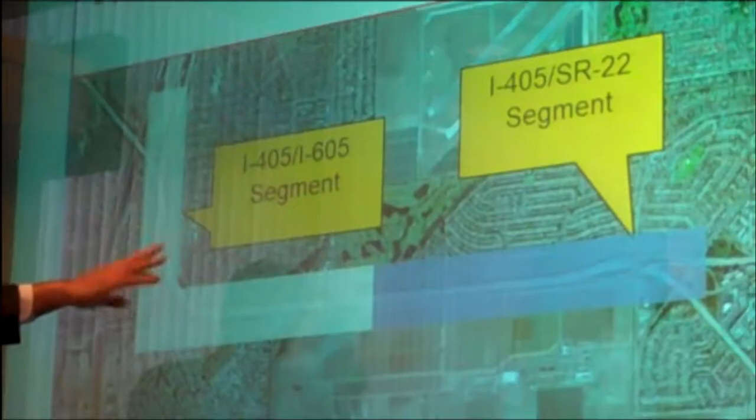We've broken the West County Connectors project into two segments: east and west. We did that for a number of reasons, but essentially the two segments take us just east of Valley View onto the 405, around about where Lampson is, and then the west segment takes us from there up onto the 605 freeway.

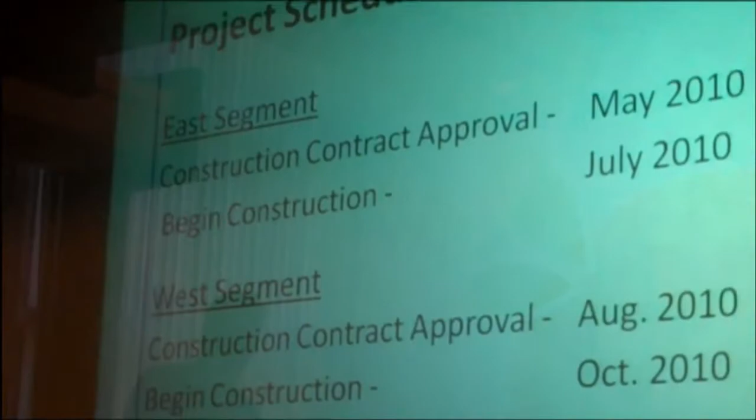So the schedule for the project: for the east segment, we've opened bids and expect construction contract approval this month. The contractor typically has 55 days to mobilize, so we'd expect to see them out there in July of this year. For the west segment, it's out for bids at the moment. Caltrans have advertised it, and we'll be opening bids on July 1st, with construction contract approval approximately August, and construction scheduled to begin approximately October of this year.

Just to give a little overview, I've spoken about us and Caltrans, and it's not an us and them scenario, but first I'll talk about the funding. For the east segment, we have a total of $200 million, a combination of $150 million in CMAQ program dollars and $50 million in American Recovery and Reinvestment Act dollars. For the west segment, it's all $200 million in Corridor Mobility Improvement Act, Prop 1B funding, for a total of $400 million as our budget.

Now, back to the us and them scenario with OCTA: we oversaw the design of both the east and west segments, and we're also providing construction management consultants during construction of the project, and overseeing the community outreach for the West County Connectors project. Caltrans provided design independent quality assurance during design, and Caltrans will administer construction of the West County Connectors project. So, where is it?

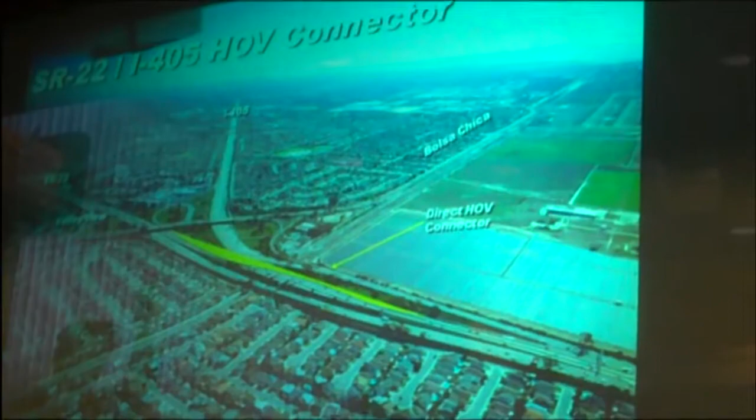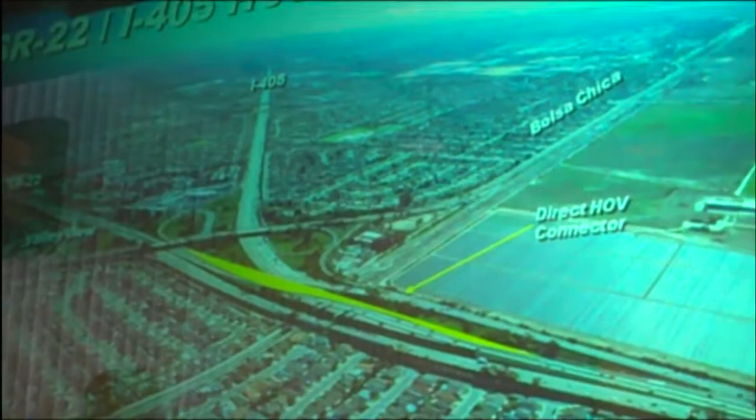I don't know how familiar everybody is with the area, but this overhead shows us over College Park East, and on the right-hand side is the Seal Beach Naval Weapons Station. We're looking down the 405 freeway, with the 22 coming out here. This overhead shows approximately where this new HOV connector bridge is going to go, from the center of the 22 freeway over the interchange with the 405 and down onto the 405 freeway. We're building an extra 2 lanes on the 405 freeway—today there are 2 carpool lanes, or HOV lanes, on the 405.

When we're done, there will be 4 carpool lanes, 2 in each direction. Up at the west end of the project, we're over Long Beach a little bit, looking back over Rossmoor. This overhead shows the approximate location of where this new HOV connector bridge is going to take us from the 405 to connect up with the existing HOV lanes on the 605.

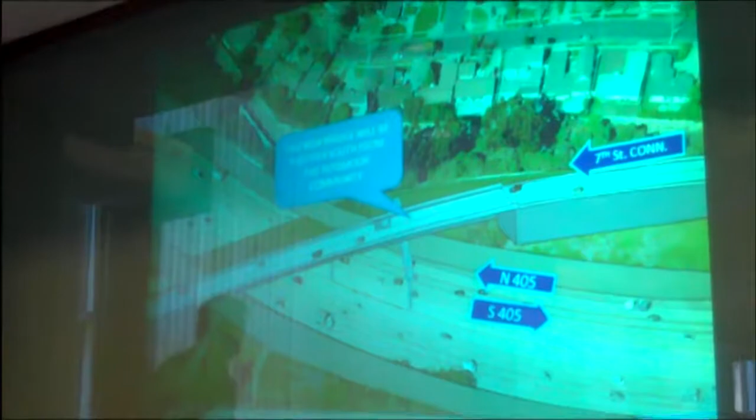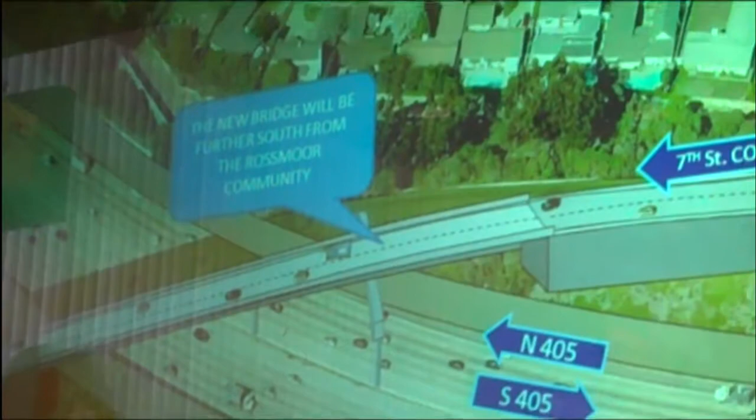As part of widening the freeway, we have to demolish a few bridges, one of them at the 7th Street off-ramp—the North 405 West 22 connector bridge. Unlike Seal Beach Boulevard and Valley View Street bridges, this bridge has to be demolished all at once, for various reasons. The simplest is space constraint—we're crossing the freeway here at an angle, and the way the existing bridge was built doesn't allow us to demolish in 2 halves, which you'll see in the next couple of slides for what we're doing at Seal Beach Boulevard.

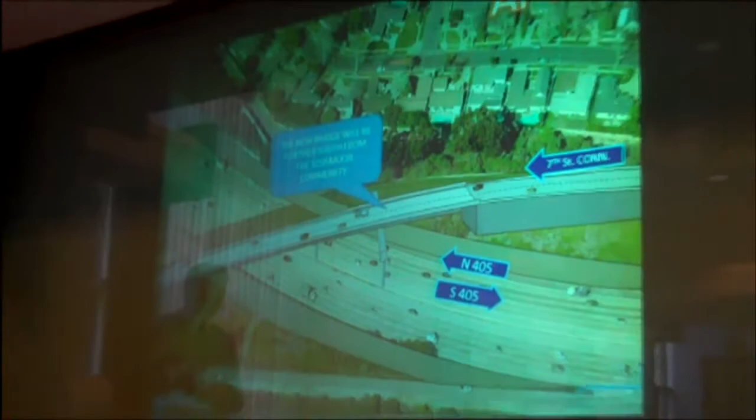So the 7th Street bridge, when we demolish and reconstruct it, will be closed for approximately 1 year. Every time I give this kind of show and tell, I stop when I say 1 year, because there's usually a collective gulp, and everybody, especially in Long Beach, freaks out—well, a year, what are we going to do for a year while this bridge is closed?

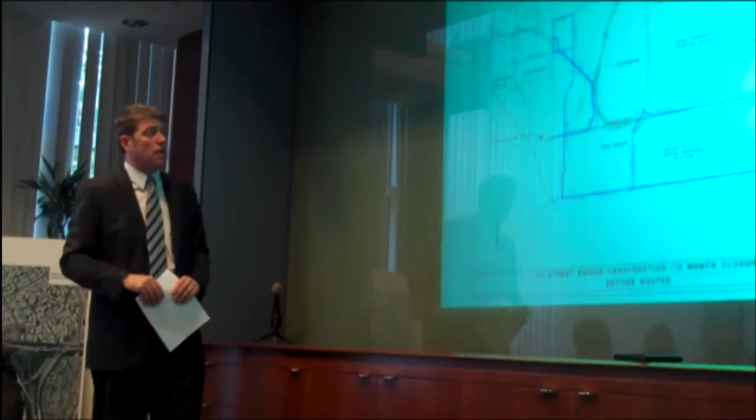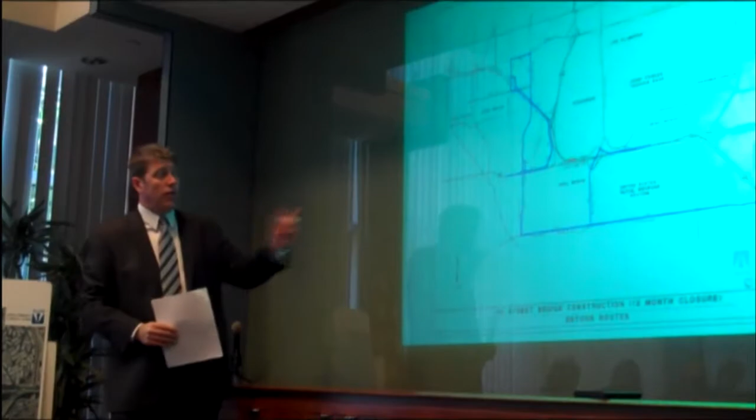And while we've worked with the cities of Long Beach and all of the others around to work on various detour routes, this one is probably the most important for when that one bridge is out, and it shows all the detour routes that we've proposed.

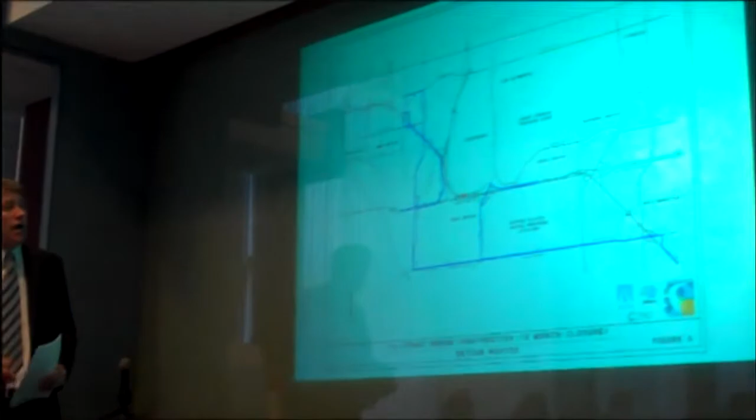We have a traffic management plan, and we have cooperative agreements with all of the cities to work through during the time when we have that detour route in place, when the bridge is closed.

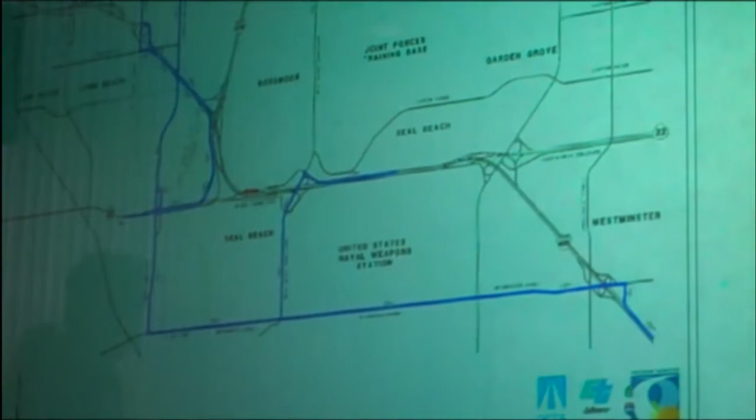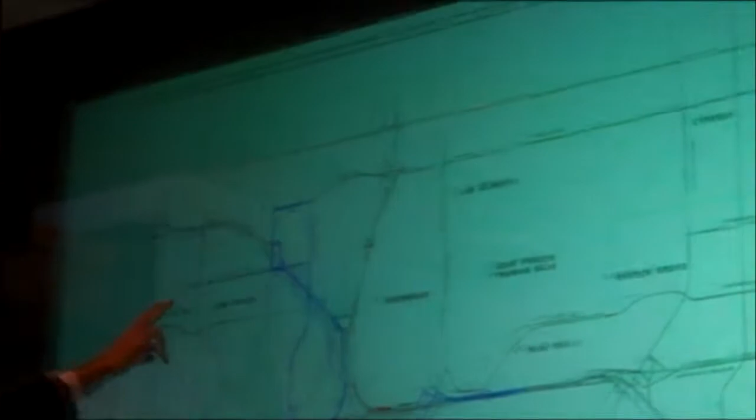You can see one of the detour routes, for example, if you're coming up to 405 and you wanted to get into Long Beach, would be to take Westminster and just take that straight into Long Beach. Or another way to do it would be to stay on the 405 and get off at Palo Verde. I kind of like this one where you take a left on Palo Verde and you get back on the 405 south and get back into Long Beach west on the 22 on that detour route.

So just to point out, it's just the north 405 to west 22 connector that will be closed. The south 405 west 22 connector and the south 605 west 22 connector will remain open. So there are various different ways to get in and out of Long Beach.

Now I talked about the 7th Street Bridge, the way it was built. Fortunately for Seal Beach Boulevard Bridge, you can see that this bridge is held up with 4 columns in cross section. And what that allows us to do is literally cut the bridge down the middle and reconstruct it in 2 halves. So the plan is to demolish the west half of the bridge first.

And to do that, we'll shift traffic onto the east side of the bridge, reconstruct the west half of the bridge, shift traffic back onto the newly constructed west half, demolish the east half, reconstruct it, connect them together, and presto, we have a new 7-lane bridge that crosses 405 at Seal Beach Boulevard.

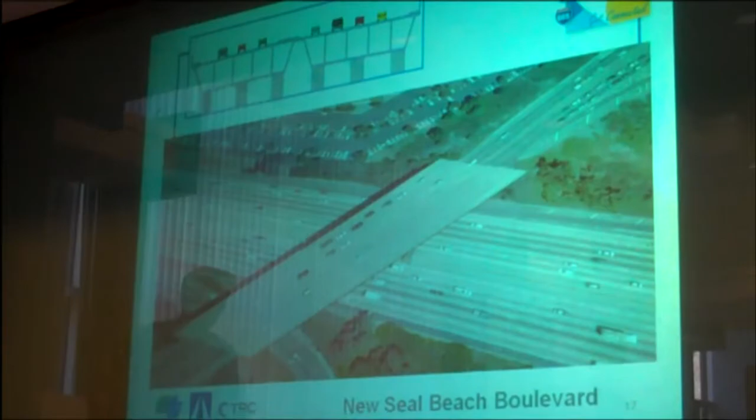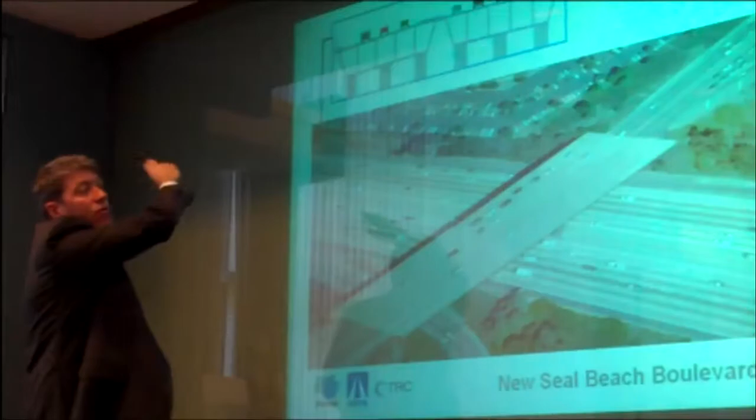And people often think, well, you've got 3 southbound, 4 northbound, why the additional northbound lane? That's really, if you think of it, almost like an auxiliary lane for traffic that comes off the 405 onto Seal Beach Boulevard, or traffic going over the Seal Beach Boulevard Bridge and getting back onto the 405 north. So there's additional traffic that takes that maneuver, and hence we have an additional lane just for that.

So Valley View Street Bridge is essentially the same as Seal Beach Boulevard. I won't go through the steps, but again, we'll demolish it in 2 halves.

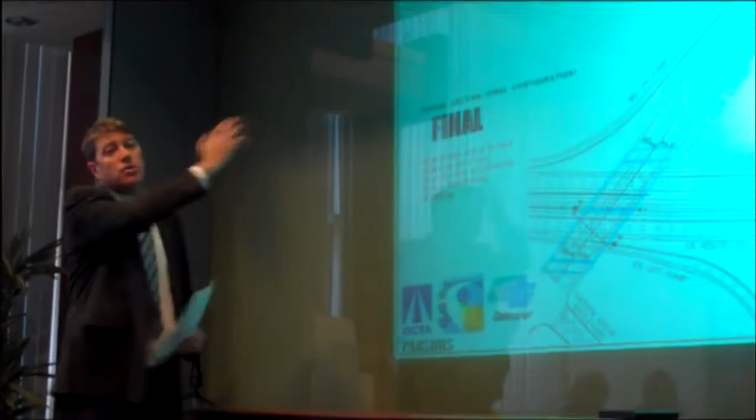One of the things to point out is that we have incentive and disincentive clauses on 3 of these bridges, and what it does is it provides an incentive to the contractor. If they get done up to a month ahead of schedule, they receive an incentive, and if they're behind schedule, they're hit with a disincentive.

And we've used this in various projects, including the I-5 Gateway project, and every time the contractor has made that incentive, in other words, it speeds up the critical components of the project to alleviate traffic congestion caused by the reconstruction of these bridges. This slide just shows you an overview of all of the detour routes.

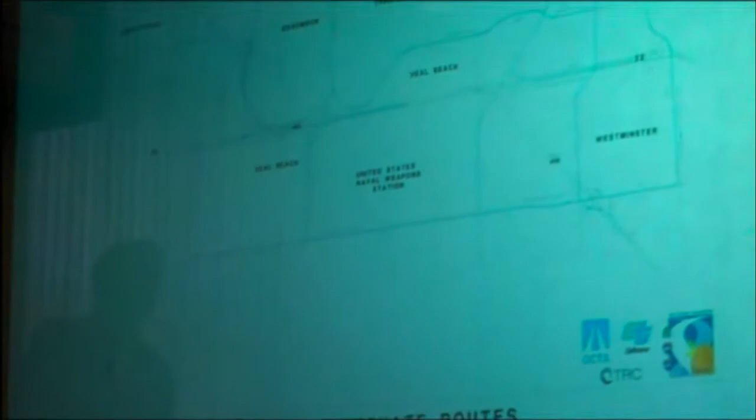Now, these won't all be in place all at the same time, but it does give you a good idea as to the scope of just how much coordination we've done with all of the other cities that are impacted, and also just how far away people will have to travel in order to get around, frankly, some of these construction issues and congestion, should we have it.

One thing to point out is on the 405 itself, we're not reducing any lanes for the duration of the project, and so we actually expect traffic to still move as well as it does on the 405.

One of the concerns that the public had was emergency services in this location, and again, we've got Leisure World to the south of the 405 and a lot of medical facilities on the north side of the 405 up along Katella. And so we've been very proactive in getting out and coordinating with the emergency services in this area.

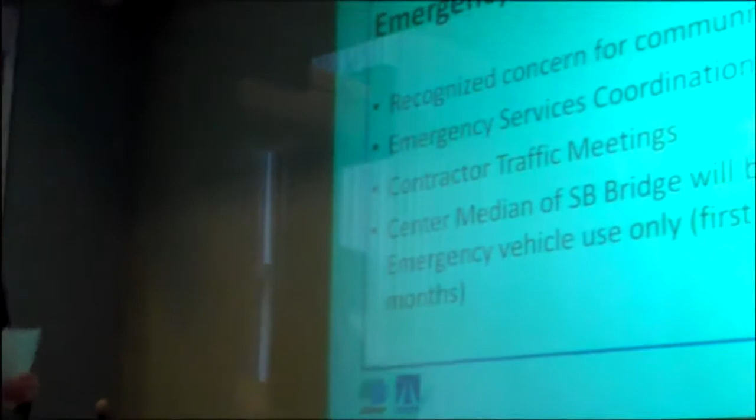And we've had a lot of meetings. We had one last week to make sure that they're talking together, that they know exactly what the schedule is, what the impacts may be, and how best they can work together to ensure that they all have adequate service during construction.

One of the things we've also added to the project is the center median of the Seal Beach Boulevard Bridge. And this is when we're just down to 2 lanes on that bridge for the first 10 months of construction.

The center median will be striped specifically and only for emergency vehicle use, and that's one of the things that they've requested and that we've been able to include in our project - they being the emergency services.

Closures: the 7th Street Bridge will be closed for up to 12 months, 11 months if the contractor makes the incentive schedule, and then the East 22 North 405 will also be closed for 10 months.

This bridge doesn't hold quite as much traffic as the 7th Street Bridge, and there are various alternatives for people in Long Beach who want to get north on the 405 to take surface streets. There are also a couple of other closures, just two weeks each: the South 605, South 405, and the East 22 South 405. Both of those also have disincentive clauses, even though they're just for two weeks.

We mulled over whether to do nighttime work or weekend work. We figured the best thing is to just bite the bullet, close the connector, and get the contractor in and out as quickly as possible. We have detour routes in place, with agreements with all the cities impacted to ensure that goes as well as possible.

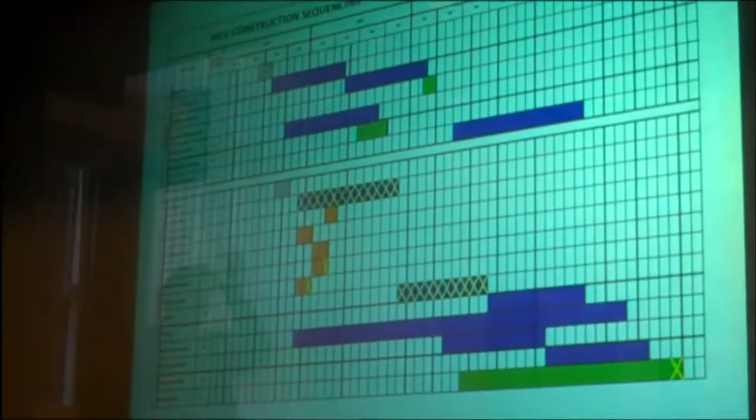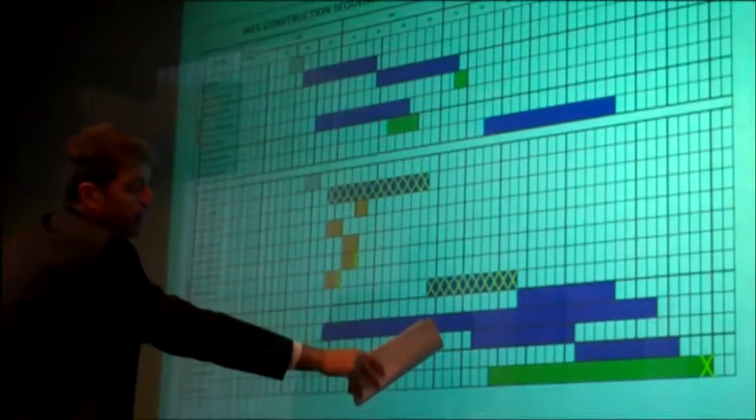This gives us an overall construction sequencing of the project. On the top we have the east segment, on the bottom the west segment. What's important to show here is that the Valley View Street Bridge will be complete before work begins on the Seal Beach Boulevard Bridge, down here, and that's important.

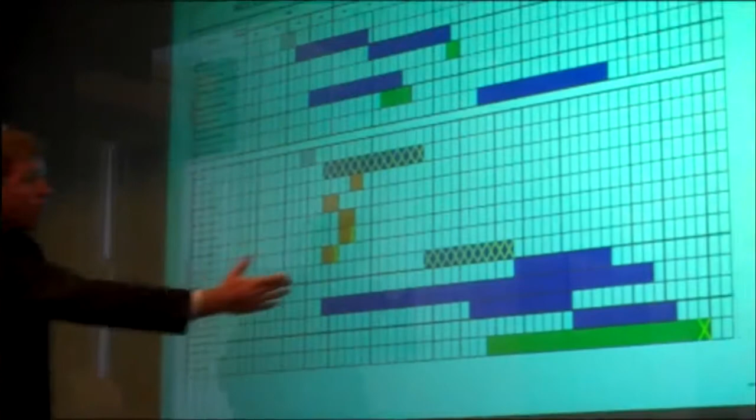Obviously, they're the only two main north-south crossings of the 405 in this area. The 7th Street Bridge, shown by the hatching, will be closed, then open again before work begins on the Seal Beach Boulevard Bridge. We've been out with the cities, trying our best to determine with Caltrans how to minimize any potential impacts during construction of these new bridges.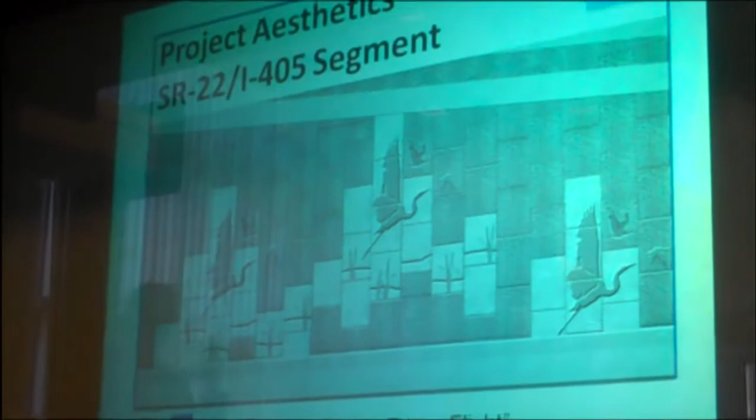The right-of-way impacts have been minimal, and we've tried to keep it that way by building these new connectors with retaining walls alongside them, so it's not your typical earthen embankment you'll see. That keeps everything close to where we need it, in the center of the freeway.

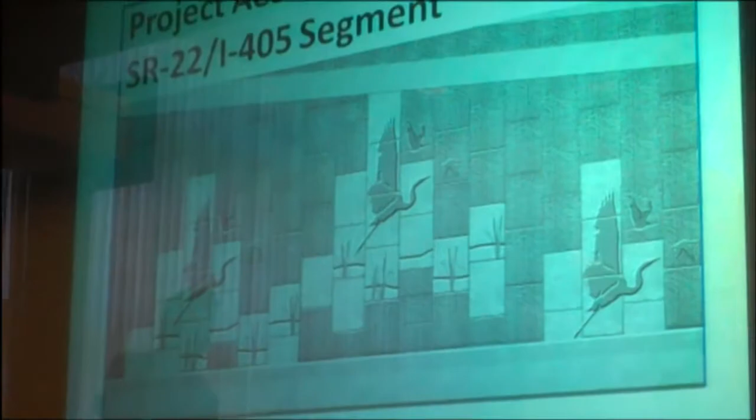With these retaining walls, we've come up with project aesthetics. On the east segment, for the HOV retaining walls, the motif is an egret taking flight, in keeping with the Bolsa Chica Nature Reserve in the area. On the west segment, closer to the ocean, toward Seal Beach, we have seals and seaweed, which the city of Seal Beach really likes.

With that, I'll hand it over to Christina Byrne, who's been our outreach officer during the project.

Thank you, Niall. I wanted to share that over the past two and a half years, we've been out speaking with the public and all the cities along the corridor, sharing aspects of the project, especially the detours. Many of them will cut off major areas of the cities, and we wanted to make sure we worked with them, especially places like Cal State Long Beach and the Veterans Hospital.

In this case, very unique to this project, we're working with a lot of communities outside of Orange County, which we haven't done very often. We started our outreach campaign during final design, which is also very unique - typically we only start about six months before construction.

Some of the main aspects of our campaign are City Council and Traffic Commission briefings, open houses, our website, construction email alerts blasted out to a database of over 2,500 stakeholders, quarterly e-newsletters, a Speakers Bureau, and media relations. Of those different tactics, we've had several accomplishments since January 2008.